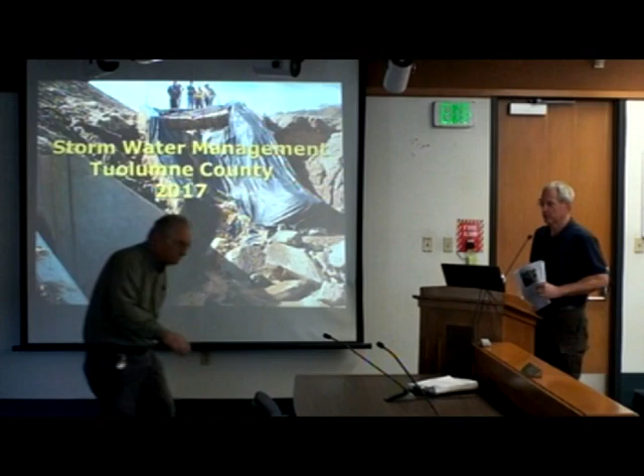And we work with both CAL Fire and some other agencies. So my name is Rich Muhl. I'm a senior environmental scientist, as Duke kind of talked about. I've been doing stormwater now for 20 plus years. I'm a stormwater specialist primarily, so I spend most of my time out in the field addressing issues and trying to deal with some of the problems.

So I'm going to talk about a number of different things today: some of the issues we saw during the 2016-2017 wet season, some enforcement examples, possible reasons for some of these BMP issues, and types of enforcement. I'll quickly go through that for anybody doing construction. I'll talk a little bit about erosion control BMPs, which are also applicable to forest practices, and sediment control BMPs, the same type of thing. Then good housekeeping and waste management, some of the other problems we had.

So I'm going to start off with the Dollar General store.

This Dollar General store - I'm going to go through a series of projects that had enforcement. Everything I'm going to talk about now had some sort of enforcement. A lot of these had administrative civil liabilities, which I'll talk about a bit later, but it's $10,000 a day, $10 a gallon is the way we calculate them.

So this is a Dollar General store. I was working in Jackson, and I was kind of barking at a guy because his site looked pretty bad. And he basically said, well, if mine's bad, why don't you go up the hill? I said, where? He goes, I'm not going to tell you, just go up the hill. It's up Highway 88. So I had to keep going until I ran into this. But when I saw it, it was pretty obvious what was going on.

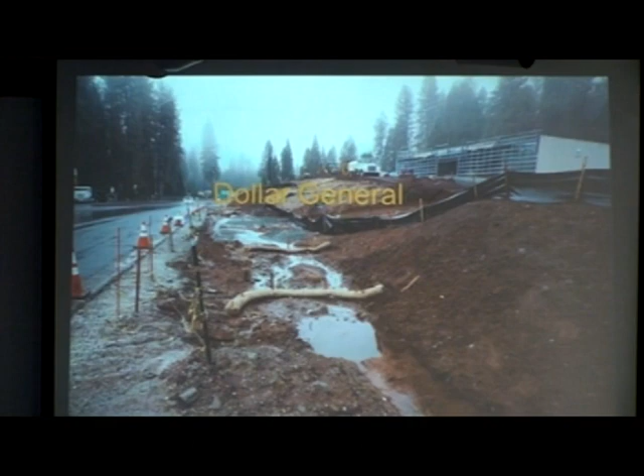So this is what it looked like when I got there. They really had no BMPs. They had some silt fence and some fiber rolls, and that's essentially all they had. You can see they got silt fence, but the silt fence is on the slope. You never want to try and put silt fence on a slope - it's going to fail if you try and do that.

And this is a risk level 2. In the construction general permit, there's risk levels - risk level 1, risk level 2, risk level 3. Risk level 2s and 3s have to have both erosion control and sediment control. Risk level 2, no BMPs, bare dirt, they're still working the ground. Now this is during a rain event when I was up there - it's raining right now.

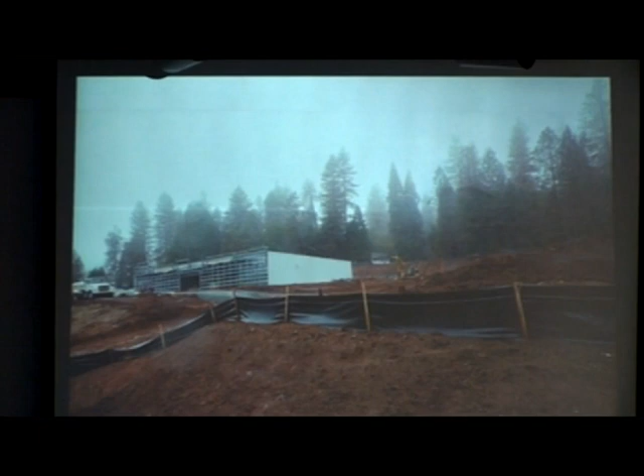And here's another picture of what it looked like. I went and talked to the superintendent. Basically I said, when are you going to install BMPs? He said, whenever I'm done. I said, yeah, that's not the way the permit works. So I explained it again to him in some detail and tried to get him to comply. We use progressive enforcement, so we always talk to the person, try and get him to do the right thing. If that doesn't work, then we find other ways to get him to comply.

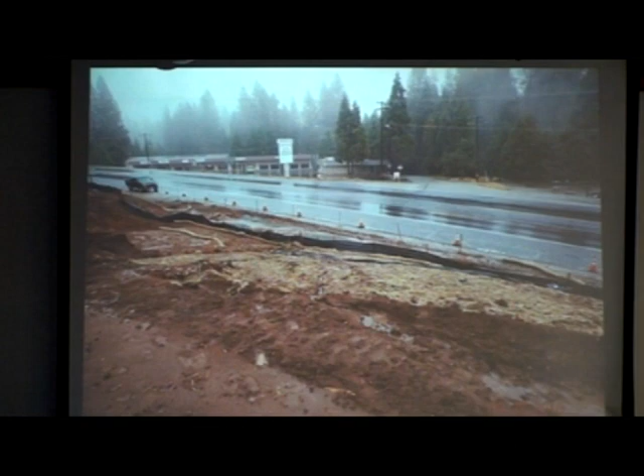So this is kind of what it looked like when I was there. It really started raining hard - it was kind of horizontal rain type stuff. It's pretty high elevation. You can see they had a light application of straw mulch, but not much, and so there was a lot of erosion going on. You can see my truck in the background down there. So it's a big site, it's 5+ acres.

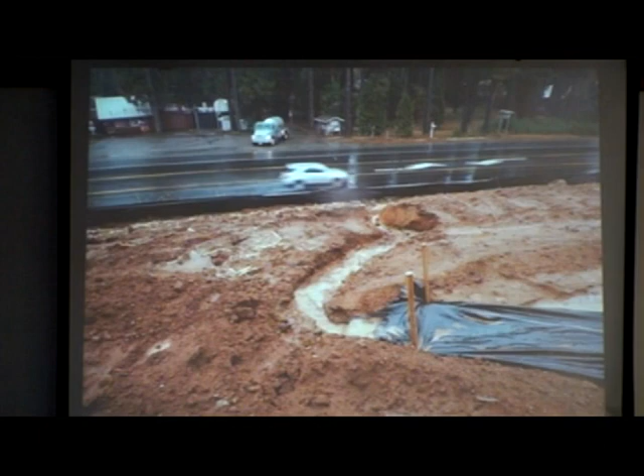One of the things they did with the silt fence is they didn't put a J hook or anything at the end to try and capture the flow. So what it did is the silt fence just directed the water right off the site, and this now became a gully. So now they're dumping onto the Caltrans right of way. It was so bad that Caltrans maintenance was there 4 or 5 times a day for 2 weeks. So they were barking at me about, hey, can't you make them put some BMPs in? So it was a problem.

The other thing that happened - I talked about putting silt fence on a slope. What happened here is a good example of it. You can see it just undercut the silt fence. A silt fence is not going to work in a concentrated flow, and so all the sediment just blew out. They got a fiber roll in there, which is kind of a token thing - it didn't really do much.

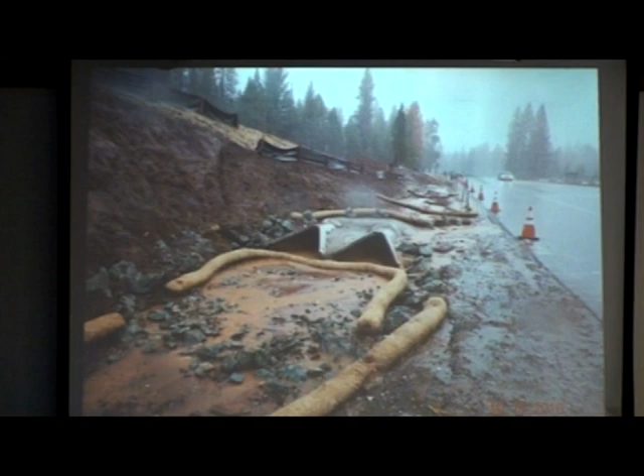So I did my first inspection, talked to the superintendent, and basically said, hey, you need to deal with this issue. This is just what it looks like on a discharge. Here's the way it looked on the street, and it goes into a culvert, goes under the road, and goes directly to a creek channel.

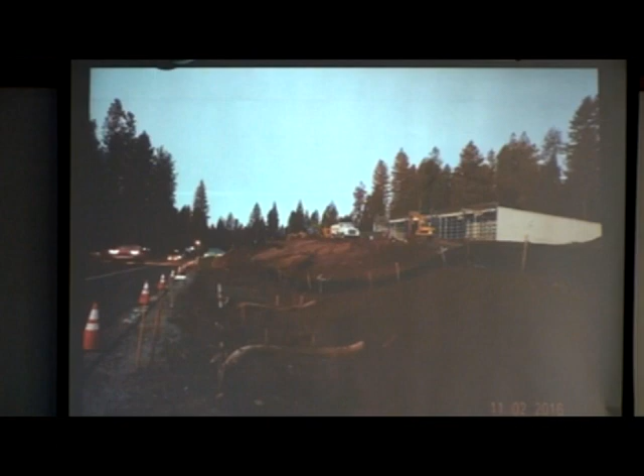So I came back about a week later. Site looked exactly the same - didn't make any changes. I mean, I think they probably tried to put some rocks on some of the fiber rolls to weight them down, but that was about it. Looked virtually the same - you can still see the silt fence. It's kind of hard up here. I don't know if we can get the front lights off or not.

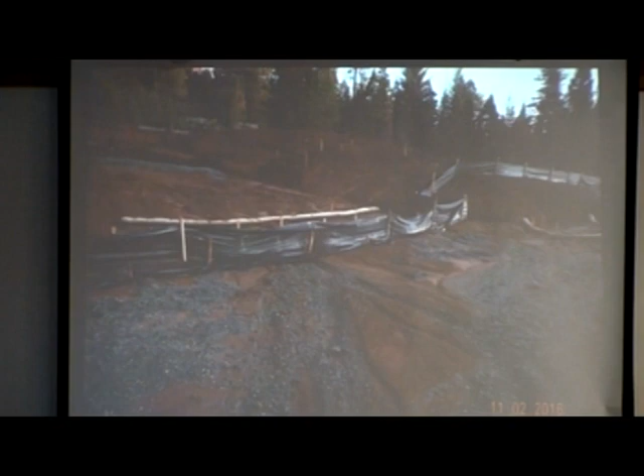No, that didn't work. Is that better? Okay, so you can see the silt fence. This was an early morning inspection, so the pictures aren't the greatest, but you can see there's still sediment going under the silt fence. It looks exactly like the last picture, and you can still see the sediment down here.

About two weeks later, I did a follow-up inspection, and now they'd installed BMPs. They've got basically blanket everywhere on the site. They put way more blanket than they probably needed, but you can see the whole thing is blanketed.

So what happened is after my first inspection I wrote them a notice of violation. I sent them the notice of violation, and they were basically warned that they needed to comply.

After that notice of violation, they had a follow-up inspection and still hadn't complied. So what we did is we wrote them an administrative civil liability. This one was for $55,000, so not a huge amount.

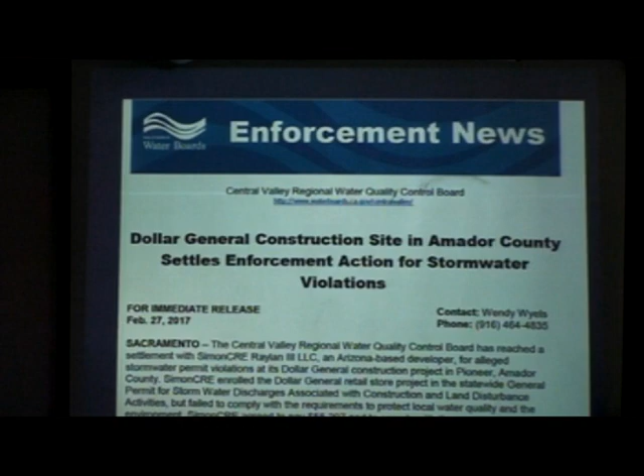We're using more of these now. There's two kinds of administrative civil liabilities we have: the full version and a compressed version. The compressed version takes the major violations and adds those in. The way our permit works, it's $10,000 per day per violation. That's kind of how the whole thing is set up.

So that's kind of what happened, and then we sent out a press release. This is a bridge project, and I was doing this particular project.

I was coming back from up in the foothills. I was wet, pretty tired, and just wanted to get back to the office and dry off, frankly. I did this project because I thought it would look really good - turns out not so much. I was there for like 5 hours.

This is what it kind of looked like when it flooded. So when I first got there, it kind of looked like this - they had a low flow pipe.

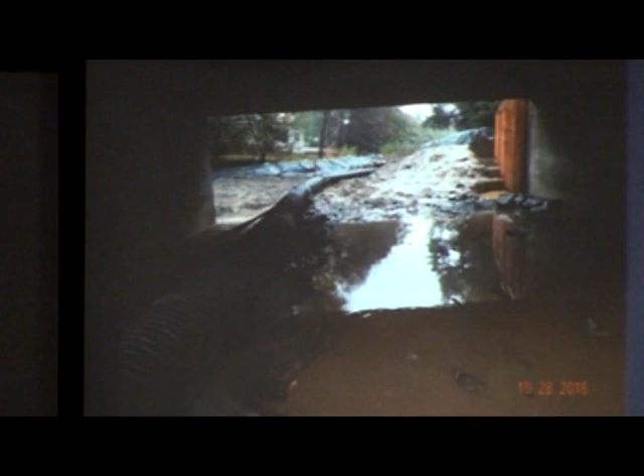Does anybody work on bridge projects? Familiar with that? You kind of know what I'm talking about - you have to have a 401, you have to have a 404. This is in a creek, so obviously it's waters of the U.S., so you have to have all those permits. Typically you dry out your work area, and then you work in your area with a method to keep it dry. In this case, all they had was the low flow pipe - this black pipe. That's all they had. They didn't have any mechanism for pumping high flows over the work area.

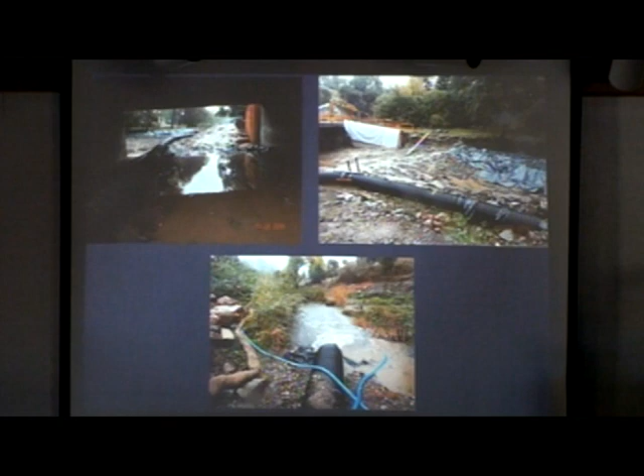So when I got there, I saw immediate problems. You can see the blue hoses - they were pumping turbid water out from inside the work area directly downstream to the creek. So that's a violation right away.

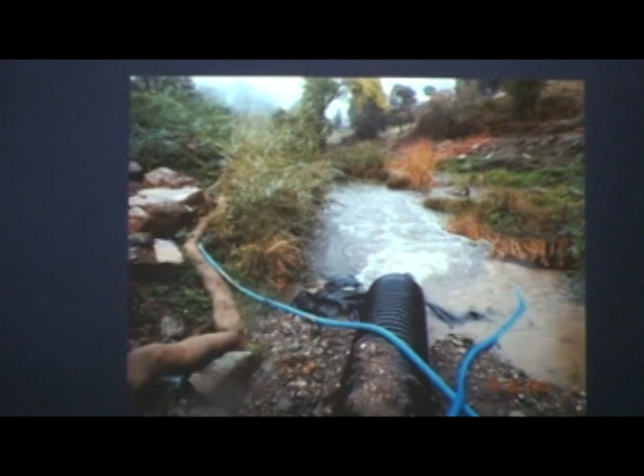But there were more issues going on. I was up at a higher elevation, it was pouring down rain, and I knew the creek level was going to come up. It always happens - it's going downhill, down the mountain. So I knew that was going to happen.

I said, what are you going to do? Do you have another pump? He said, we don't. We don't have a plan. So that's kind of what I got.

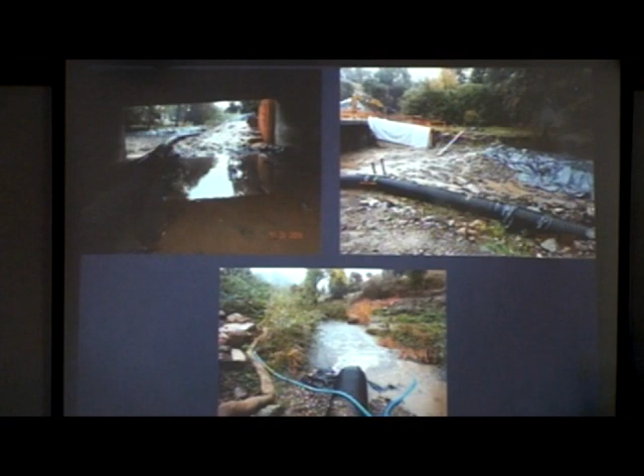So I suggested strongly that they go rent a pump or try and do something. But eventually, before that, they also had the excavator working down in the creek, trying to pull off the false work so it doesn't float down the creek when it floods, because now they're anticipating it's going to flood.

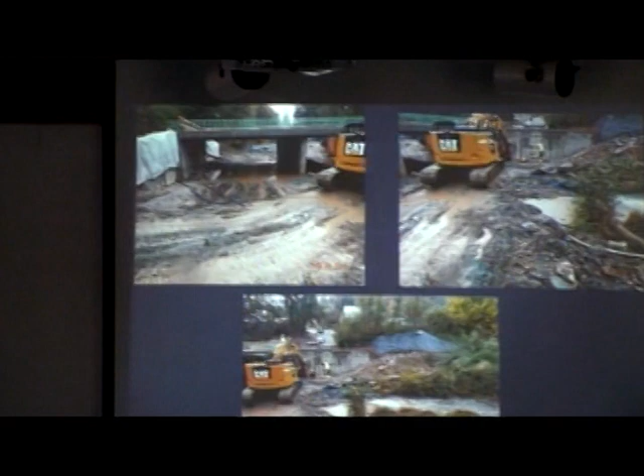So it's raining, and they're running back and forth through the creek channel in the rain. You can see in the upper right-hand picture they don't have a downstream dam, so the grousers are creating turbid water right there, and they just created this kind of mud hole.

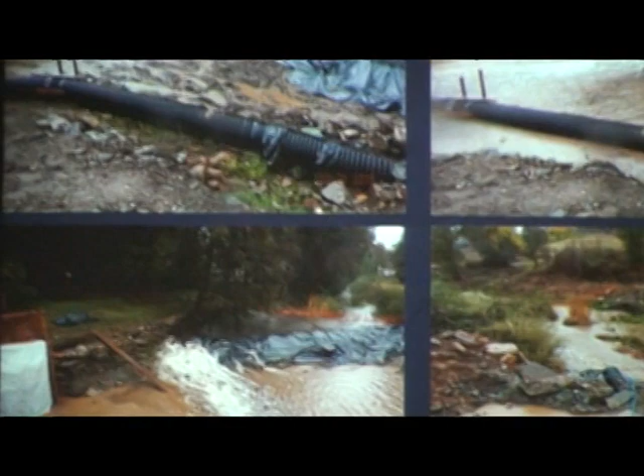Well, what happened as advertised - the water level started coming up, and I'll show a video at the very end of what it actually looked like. You can see on the upper left it started breaching the dam, then breached the dam, and then finally flooded through the entire site.

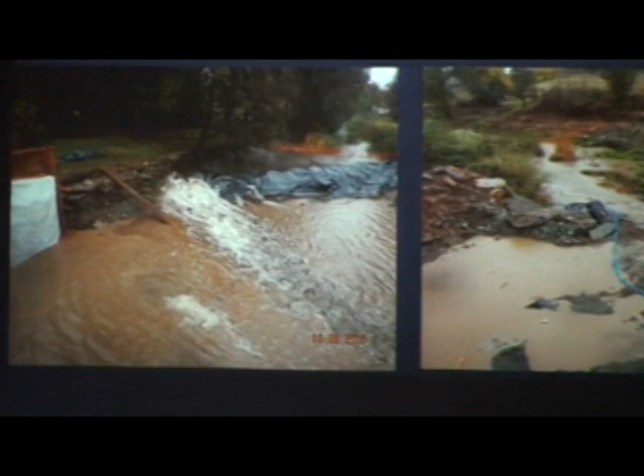And the dam was just rock with plastic on it, so it was seeping like crazy anyway - not a very good construction for trying to dewater a work area. I don't know why they didn't use sheet piling or something else, but at any rate, this one also received an ACL, and it was just kind of a no-brainer. I couldn't do much about it.

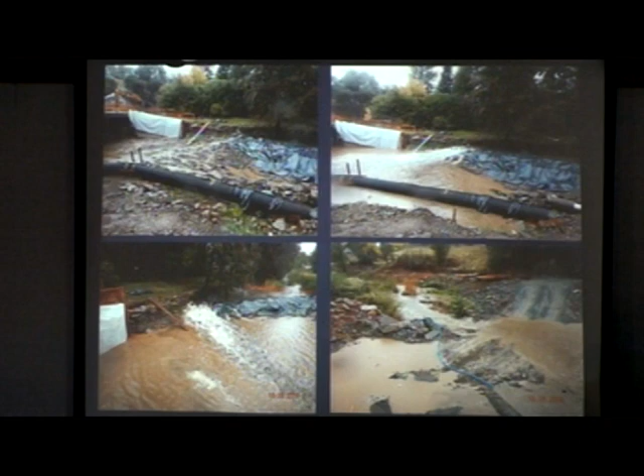What made matters worse is one of the guys working there said this was actually the second time this had happened, so that didn't help the situation either. That was unfortunate, but everybody learned. This particular bridge contractor, I've had him on a couple other projects this year, and they're much better. I think it was a learning curve.

This is kind of what it looked like. Eventually I had to crawl back over the false work because I realized I parked on the wrong side of the creek, so I had to crawl back over everything to get to my truck. It was an interesting day, but a lot of water goes through that creek during high flows.

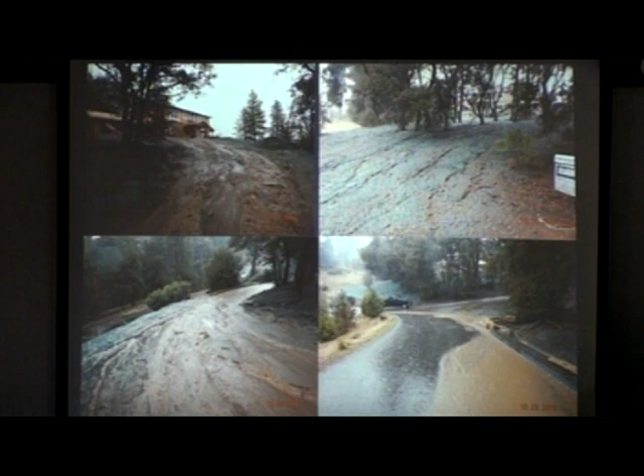Another project where you can see they sprayed it with erosion control. As I said, for risk level 2 and 3 projects, you have to have both erosion control and sediment control. If you have a risk level 1 project and you're around Sonora, you still need erosion control - you've got to have it around here or it won't hold up in the winter. It isn't required by the permit, but in order to really control the sediment on your site, you're going to need that too.

In this case, what they did is spray it with a light application of some sort of erosion control - I don't know what it was, but it wasn't bonded fiber matrix. Whatever it was, it just completely rilled out. It didn't hold up. This is a fairly high elevation, but regardless, it should have held up better than this.

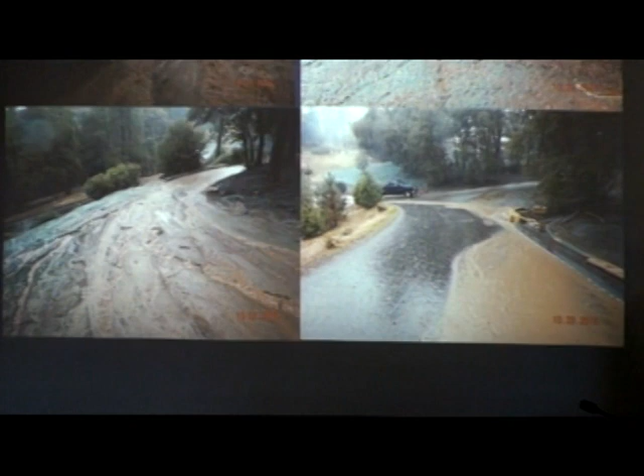The other thing they forgot about, as you can see in the lower picture, is where all the water was going to go. It was going to go down the paved driveway - it's paved, so it can shoot straight down. All that water, which later when it was done makes a lot of sense, but not so much during construction, just ran down the road to a creek, passed my truck there, and created all kinds of problems. In the lower left, you can see how much sediment actually ended up on the roadway - a crazy amount of sediment. That in itself is a problem.

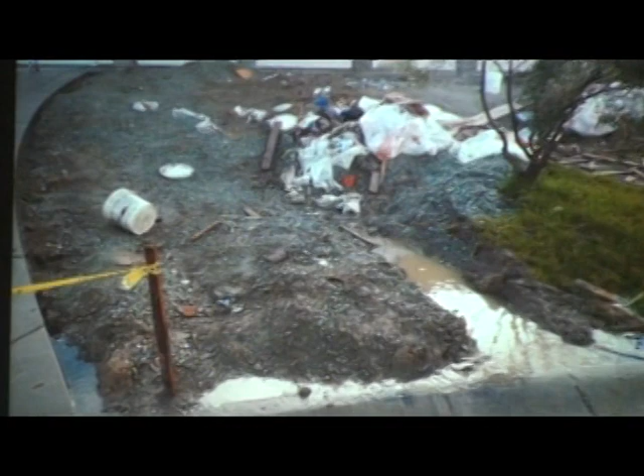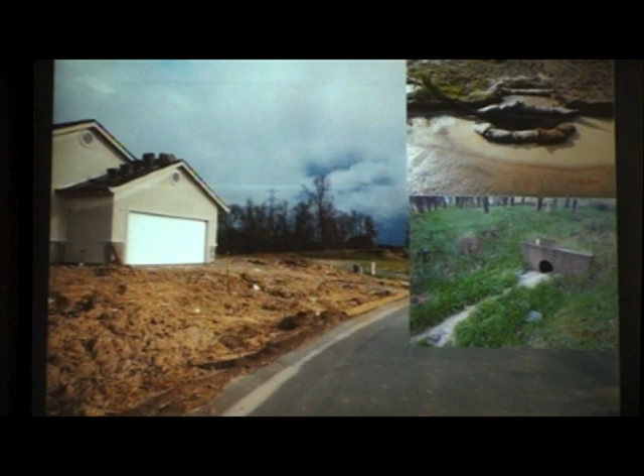Another site that got an administrative civil liability from us, a fine. This particular one had really poor housekeeping, and they just didn't install any erosion control BMPs. Again, it's a risk level 2 site. They had all kinds of persistent issues - we talked to them multiple times, the county went out and talked to them multiple times, a different county, not Tuolumne, and the county wrote stop work orders against them. They still decided not to do it, so we wrote them an administrative civil liability. This particular individual has been fined by us before for a couple hundred thousand dollars, so their track record isn't going too well right now.

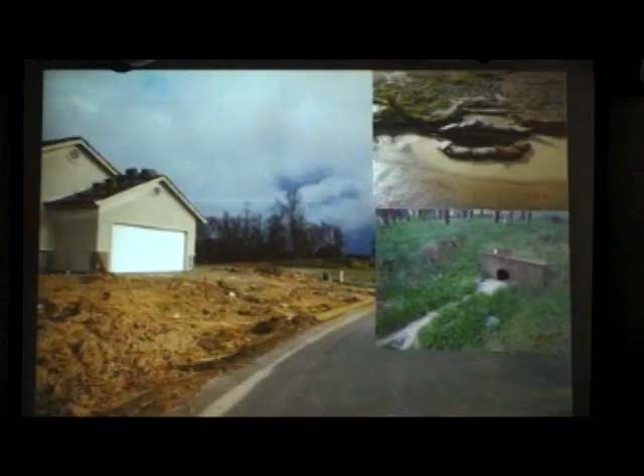You can see all the sediment in the upper right-hand picture, around that drain inlet - that had been going on for a while, it didn't just happen overnight. And the bigger picture shows there's really no erosion control at all. They did broadcast some straw, but it isn't going to do much.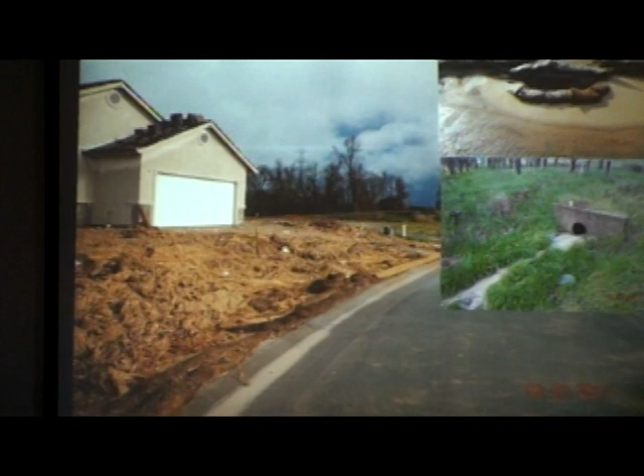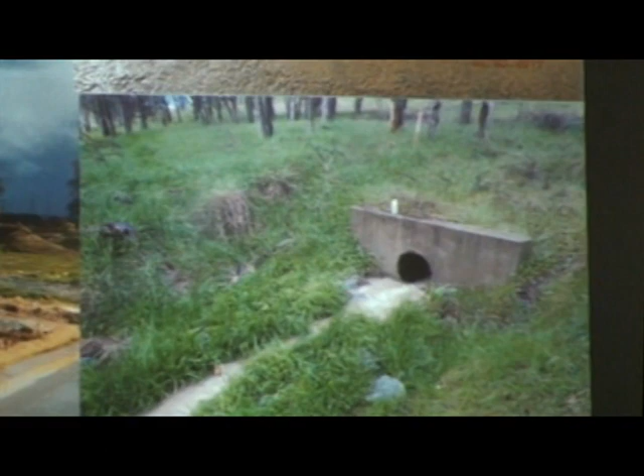You can see my sampling bottle here, down by the creek where it went in. Typically we always sample. In this particular inspection, the QSP - there's a QSD and a QSP on construction projects - was actually doing their own sampling, and we got the same numbers for our turbidity readings. We all agreed on everything we saw, so that was kind of interesting to do a joint inspection. We did them separately, then came back and shared our results.

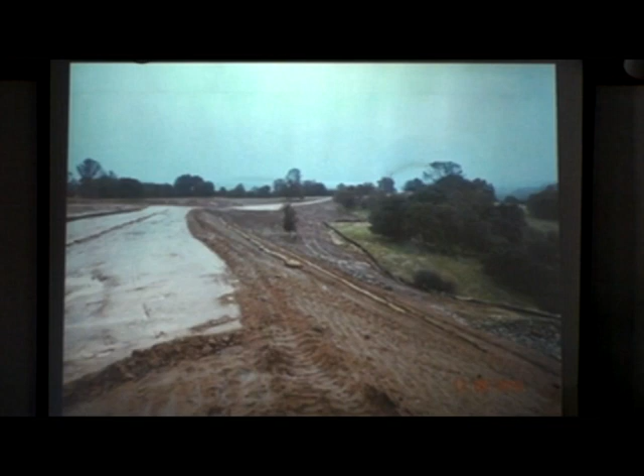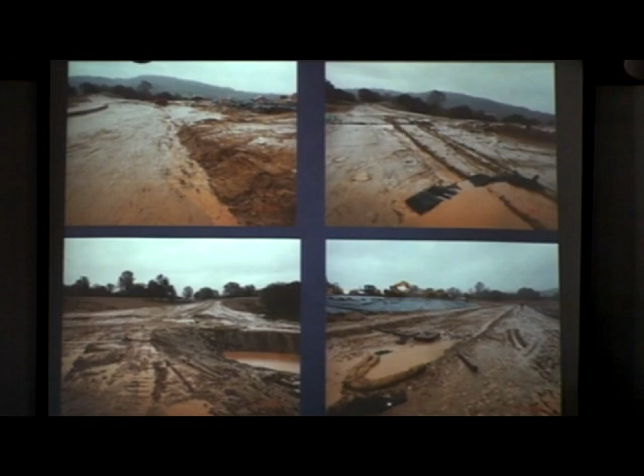Here's another project with a lot of slopes - a long linear project, a lot of slopes, open ground, right before a predicted rain event. I went out and did the inspection on this one, thought it would look good, took a look at it - there were a lot of problems. I went back and talked to the superintendent, who hadn't walked out there yet to take a look at what was going on. You can see a lot of slopes, a lot of issues. One thing that happened here: there were some sediment control BMPs put in place, but no erosion control BMPs.

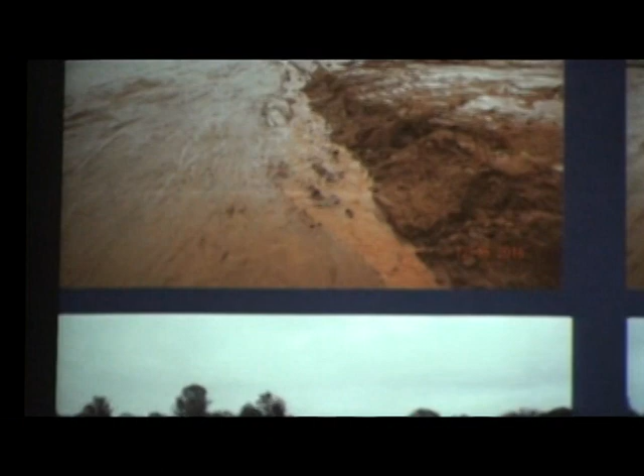What was happening is it was just flowing over the top of the sediment control BMPs. So we got long runs, and the water really gets moving. The other thing that happened, you can see it rilling down on the upper left there, cutting through. There's some rock bags, some BMPs in place.

There was a small basin, but not enough to really stem the flow of water coming down the hill. One of the other things that happened on this project, and I'm talking about it because it's good training, is the road was compacted. When you compact a road, do you get more runoff or less? You're going to get more. And what happened is the storm drain system went active just a couple days before that too. So the storm drain system, now active, picked up all this water and shot it down the hill in a more concentrated flow, which made it much worse than before because it just sheet flowed off the site.

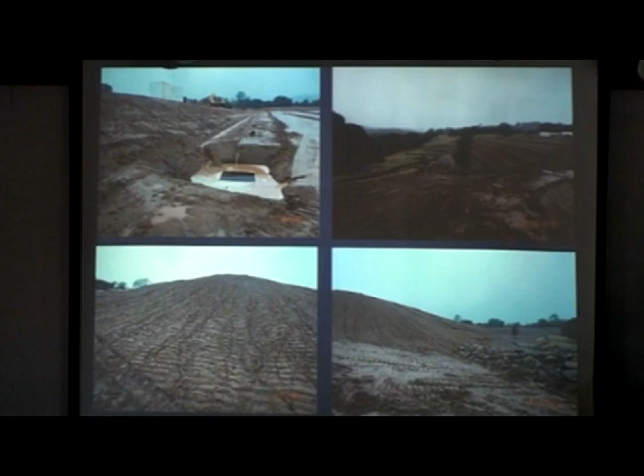So that's one of the problems. And then you can see big slopes with really no BMPs. On the bottom you can start to see the rilling. Once it gets rilled out, it creates a lot of problems. This particular one got buttoned up eventually, but in Sonora particularly we've had a lot of problems. If you get behind, it's really hard to catch up if it keeps raining. Once the ground gets saturated, you really can't rework it, and that's the problem.

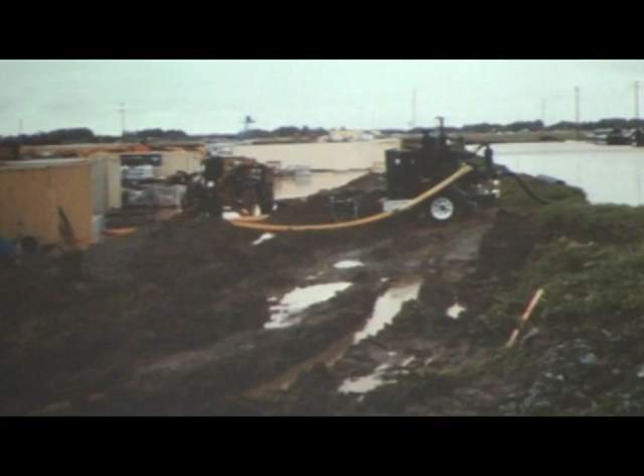This particular site is Amazon, in Sacramento. They got an enforcement action from us. This is a big site and they really never dealt with the run-on they had. They had a lot of run-on coming onto their project, which they really should have tried to divert around it, and that would have helped their situation, because they were dealing both with the water that fell on this large site as well as the run-on coming onto their site. So if you have a facility or a project with run-on, try and get the run-on around your site. Don't try and deal with it on your site. This is a good example of that.

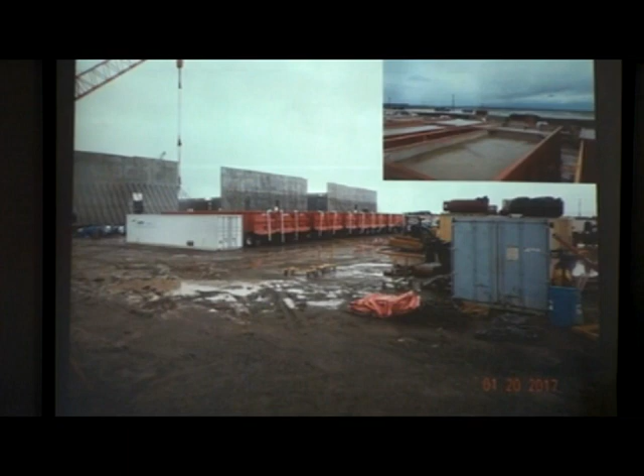The other thing we saw is a lot of advanced treatment systems going in - they were going in everywhere. Advanced treatment is when you can't do anything else, you've got to treat all the water, reduce that turbidity level, and sometimes reduce the pH. We saw a lot of those types of things going in. This is a big system, also at Amazon eventually, because they couldn't do anything else - they just had to treat all the stormwater.

The other thing we saw - I don't think you use lime treatment a lot around here? Do you treat with lime? Okay, it's pretty rocky anyway. Down in the clay soils they do.

So I want to talk a little bit about the type of enforcement we have at the regional board. We have verbal warnings. So anytime I'm doing an inspection and I see something that's probably not going to work, or I think it might not work, I'll say something like, you might want to take a look at that portion of your project, I'm not sure that's going to work very well.

You might just look at the BMPs, or if they aren't maintained, I'll say, hey, you probably need to maintain those BMPs, they're not going to hold up. That's considered a verbal warning, so that goes into our stormwater management database as a verbal warning.

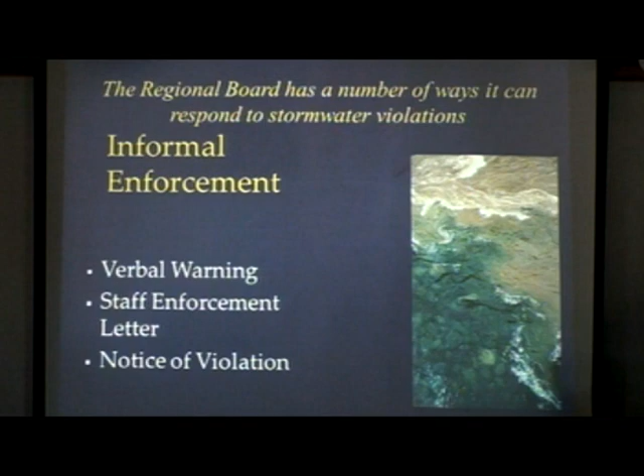The other one, more informal, we don't do staff enforcement letters, but we will do notices of violation. A notice of violation will compel the property owner. All of our enforcement goes to the property owner, which sometimes gets confusing because they paid the contractor to do the work and all of a sudden they get this notice of violation and aren't sure what it's for. So you want to communicate with them if something happens too. The notice of violation asks them to do a bunch of different things - it could be to add additional BMPs, to provide a class to their subcontractors. It just depends on the situation, kind of what we require.

Our penalties are $10,000 a day plus $10 a gallon, $10,000 a day per violation. For the Dollar General store I showed, they had $50,000 the first day I was out there - there were 5 separate major violations, so that was $50,000. Obviously they add up really fast, so you want to try and stay off our radar.

If a regional board inspector or municipal or county inspector comes along and says, hey, you need to fix this, because they'll talk to us and we're often aware of some of those problems, that to us is a verbal warning already, so we're quicker to go to enforcement.

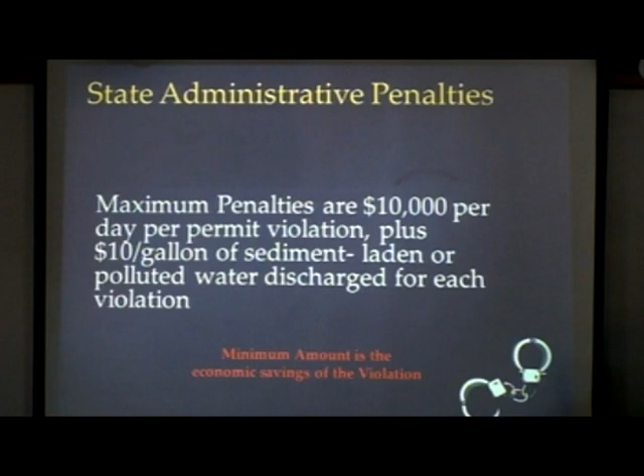The other thing we have to do is calculate the minimum amount of economic savings. There's a savings in not installing these BMPs - you don't have to put BMPs in, it saves you money. We have to calculate the minimum amount of economic savings in our enforcement so the discharger has to pay for that plus whatever the penalty is. Sometimes that adds up pretty substantially on some projects.

Formal enforcement - a cleanup and abatement order is where we ask somebody to clean it up and get rid of it. For instance, in Tuolumne County several years ago, someone built an illegal dam - he had a friend who traded him a case of beer for building a dam in a creek. About 5 days later, the water level came up and washed the dam away. It wasn't engineered, it wasn't constructed properly, I don't think it was compacted either, so it all washed down into the creek. We wrote them a cleanup and abatement order - he had to go in and clean it up, which they did, and had to restore it, get permits through U.S. Fish and Wildlife and the whole permitting maze of stuff. At any rate, that got cleaned up - that's a cleanup and abatement order.

A full administrative civil liability is the larger one, where we're taking all the violations from the first time we went out there to whenever it got solved - all the violations per day for the whole time. A streamlined ACL is what I talked about earlier, where we're taking the major violations and adding that in. We can use either one of those.

Joint enforcement with the Department of Fish and Wildlife now, or the US EPA - I do a lot of joint enforcement with the wardens and Fish and Wildlife on a lot of different things. Some of my cases also get referred to the district attorney or the circuit prosecutor's office, and some go to the attorney general's. Those are the larger ones - we've had some fairly large ones recently.

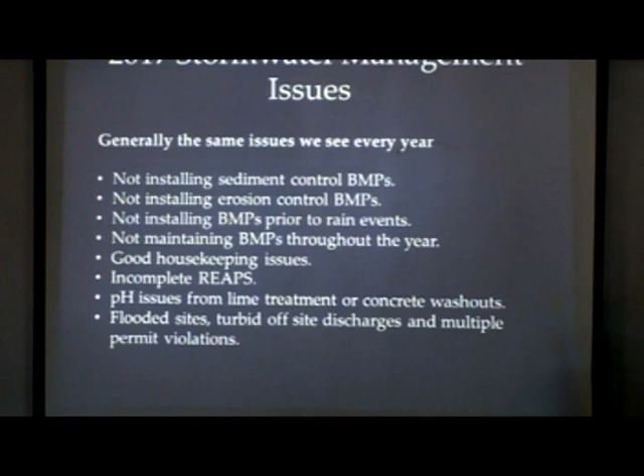So what were some of the issues? They're kind of the same issues we have every year - not installing sediment control BMPs, not installing erosion control BMPs, not installing BMPs prior to rain events, and not maintaining the BMPs. That's the other thing throughout the year - there's kind of two seasons. The first half of the year, we try and get people to put them in. Then after Christmas or New Year's, we try and get people to just maintain what they put in because they're wearing out.

Stormwater BMPs don't last forever, so you have to go in and maintain them. You got to make sure they're still functioning. And that's why there's inspections. There's a requirement to do inspections in the permit.

Good housekeeping issues continue to be a problem. Anytime there's a facility or a site project that has bad housekeeping, what we'll do is stop, get out, walk around, because we always find other problems. We also get good pictures for training, but incomplete rain event action plans.

There's a requirement in the permit that 48 hours before a rain event, you have to do what's called a REAP, rain event action plan. Basically what you do is write down that there's a predicted rain event greater than 50%, and here's what I'm going to do to stabilize my site. Then you go out and implement it. A lot of times the REAPs aren't being done.

pH issues on lime treatment, not up here, but in other areas, has been a huge issue. Concrete washouts continue to be an issue.

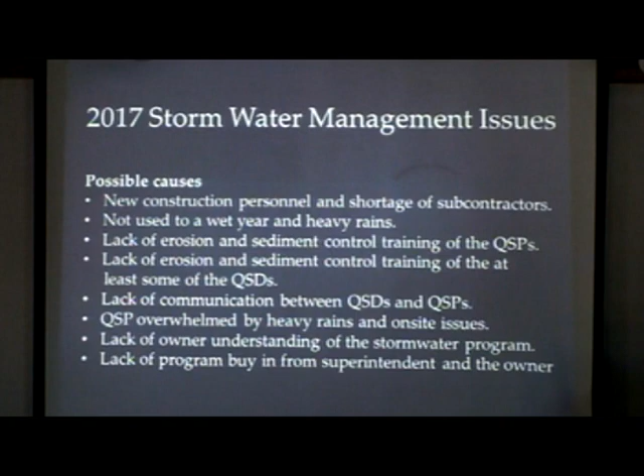There's also a lack of program buy-in from the superintendent and the owner. Some superintendents just don't care. I mean, that's all right, but that's our job then to try and flesh them out.

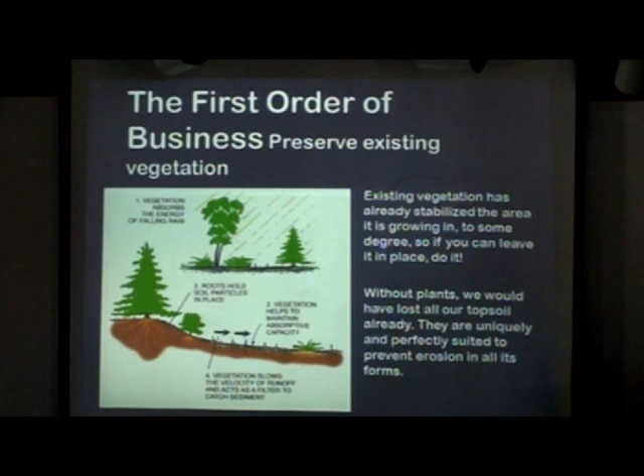So I want to talk a little bit about what to do, what we want to see when we go to a construction site, and some ways you can stay out of trouble. One is if you can preserve existing vegetation around the outside of the project, it's a huge BMP, even if it's just a 10-foot strip of grass. Doesn't have to be a lot, anything. Especially if it's tall weeds, it'll take out a lot of that turbidity or turbid water. It'll help filter it and catch a lot of the sediment moving around the site.

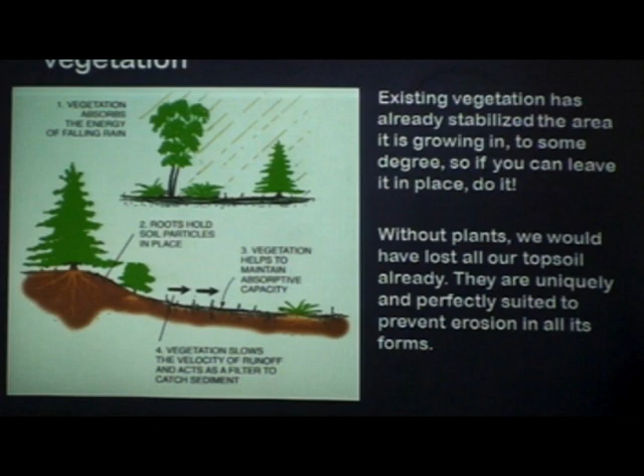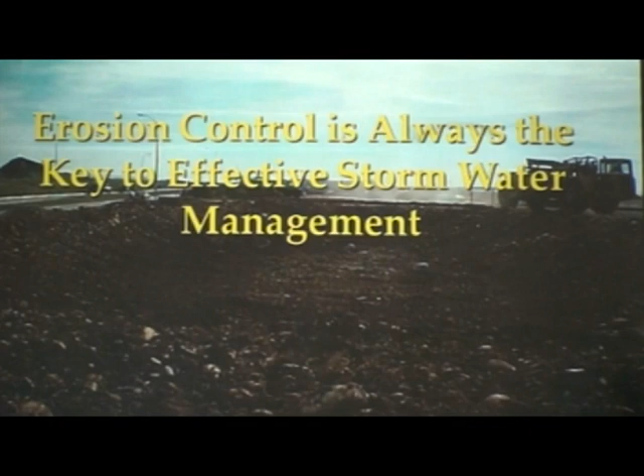Erosion control is always the key to effective stormwater management. The difference between erosion control and sediment control: erosion control protects the dirt or soil from the impact of raindrops. When it rains, the raindrop comes down around 20 miles an hour, hits the soil, and breaks it apart. That's called splash erosion, and it runs off as sheet erosion typically on a construction site. Roughly 70% of the erosion off a construction site is sheet erosion. So if you can protect the soil from the impact of the raindrop, it's not going to break apart those particles. I have a slide, not in this presentation, that shows a raindrop coming down and blasting the soil particle apart. Especially in a heavy rain up here in Sonora, that's what happens all the time, and that's why it loosens everything up - you could see from the pictures it was just flowing straight off site.

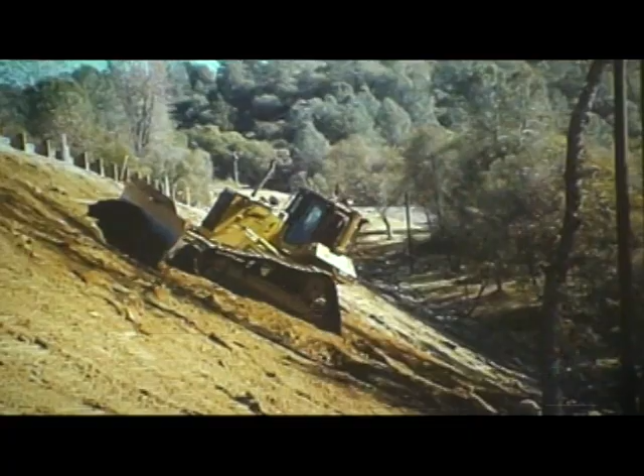So erosion control is always going to be the key. Track walking - you could see some of those projects I showed had very minimal track walking. What it's doing is the grouser's going up and down the hill creating little ridges, so the water has to flow over them. But that's not going to work if you get a lot of water. It'll work for a real lightweight rain event, but you've got to put something on top of it.

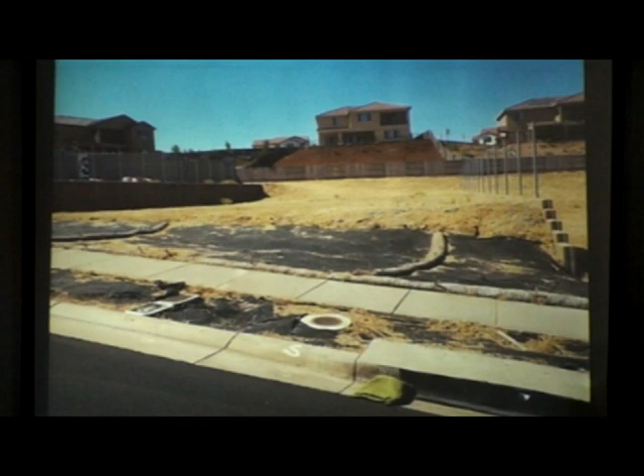Here's straw on a little larger subdivision - not a big subdivision, but still this straw is in a pretty good place. You want it down thick. If you're going to hand broadcast it, about 2,000 to 4,000 pounds, so it should be thick. It takes a lot of bales.

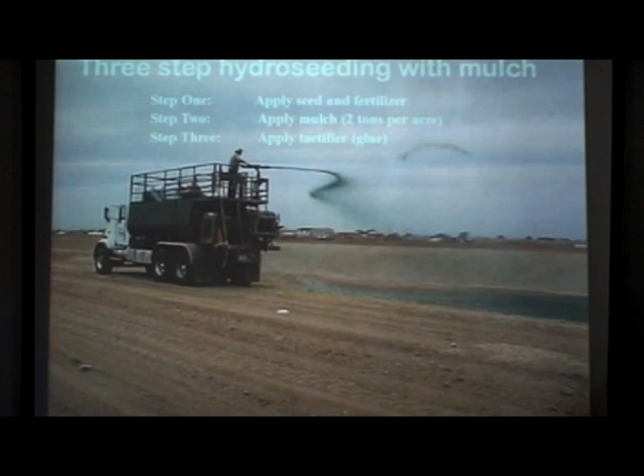Three-step hydroseeding with mulch also works, that would be the next step up. You want to make sure you apply it in three steps, not all in a slurry. There are different ways to do it now - the technology for some of these spray-on applications has gotten really good, much better than it used to be. It used to be okay, but now it's getting much better. Some of these will heal themselves quicker - if there's a break in them, they'll kind of seal back together. They do a lot of stuff. You want to try and apply the seed and fertilizer first, then the mulch over the top at 2 tons per acre, and then the tackifier or glue.

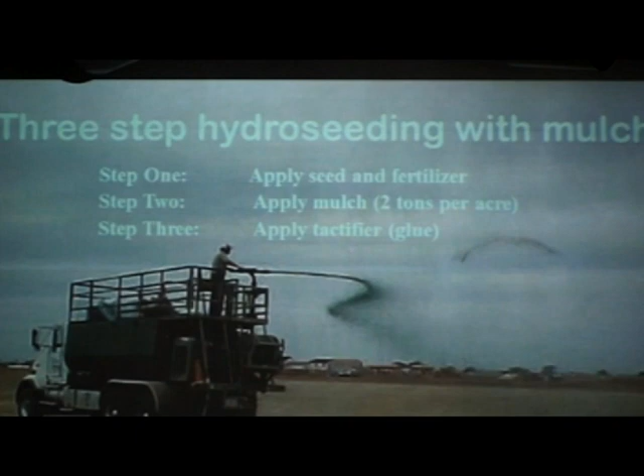A tackifier is guar or plantago, essentially like Elmer's glue kind of, not really, but it sticks the straw in place. Before a rain event, it typically gets windy. So if you hand broadcast a bunch of straw, the wind will come up, and I've seen multiple sites where it'll blow the straw on one side, leaving a bare slope with all the straw at one end. If you can get it tacked down so it sticks together, that's going to really help.

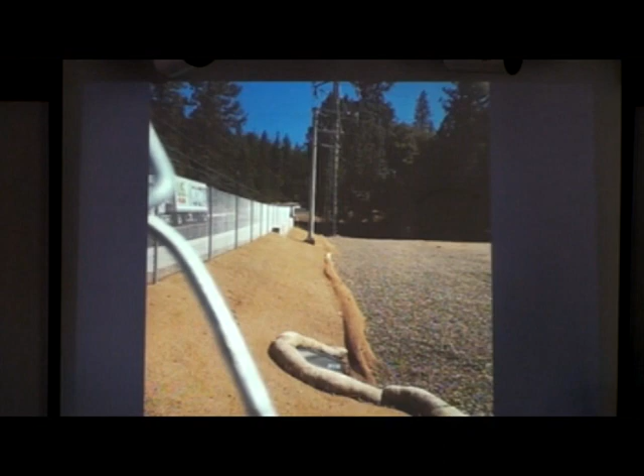Here's a better application for blanket, a little small, along a roadway—I think this is Highway 80. You can see this is a laydown yard they have, but this is a better application for what it is. Some people use geotextile fabric too, I see it used around here, and it works well.

You just put geotextile down, and you can sometimes reuse it too. That's another good thing to do, especially if you have clay-y soils with a lot of clay material—it won't pump through it, so that can sometimes help. And then you can see the fiber rolls on the outside.

Hey Rich. Yeah. That plastic, if you did a big enough application, could you actually end up getting sued for creating problems downstream for adjacent property owners? Because you've modified the basin there.

That could easily be the case, because on this particular project, I don't know how high the runoff was, but once they put the plastic in it created all kinds of downstream problems. So it's possible, yeah.

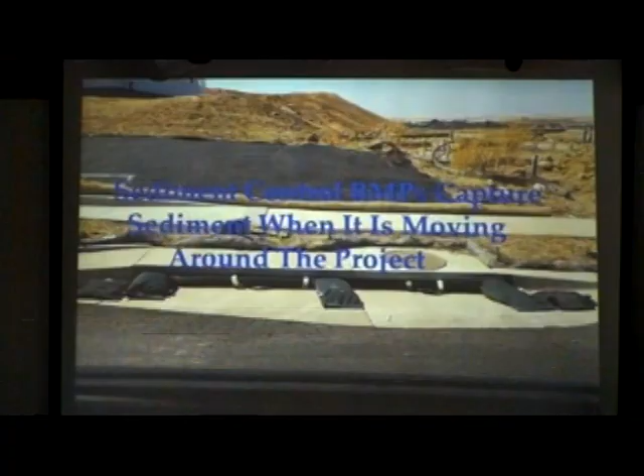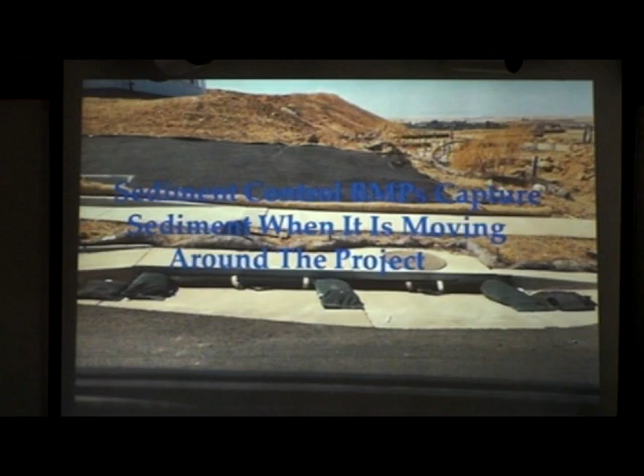Sediment control BMPs are going to capture the sediment. Erosion control is going to protect it from the impact of the raindrop. Sediment control BMPs capture it once it's moving around, so that kind of makes sense—you don't want to try and capture it, just keep it locked in place. They're going to capture it when it's moving around.

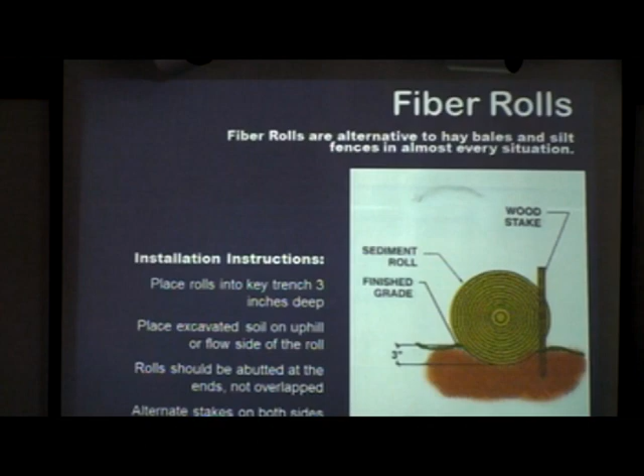Fiber rolls—basically fiber rolls, you see a lot of them. There are different kinds. If you use the wildlife-friendly fiber rolls, you can leave them in place at the end of the project. If you use the netted fiber rolls, you have to remove them at the end of the project.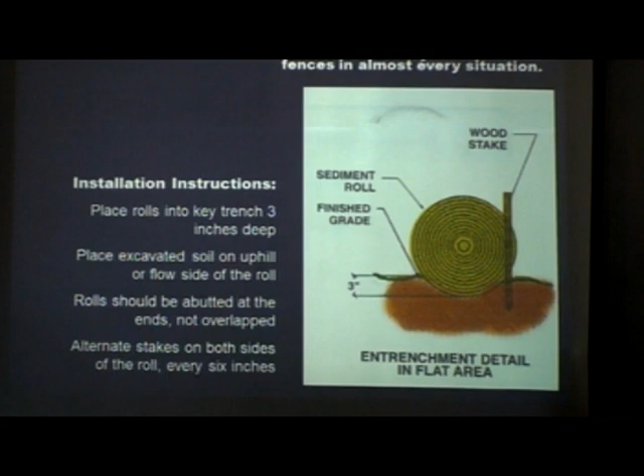This staking pattern—this is an old photo, I'm not sure this staking pattern is exactly right, but you've got to stake these things down. If you just lay them on the ground, they're not going to do anything. They're round, so you've got to make sure the bottom is down so when the water hits it, it'll actually stop. There are some studies being done on these fiber rolls now—in certain applications you don't want to stake them down really hard, but that's all anecdotal so far.

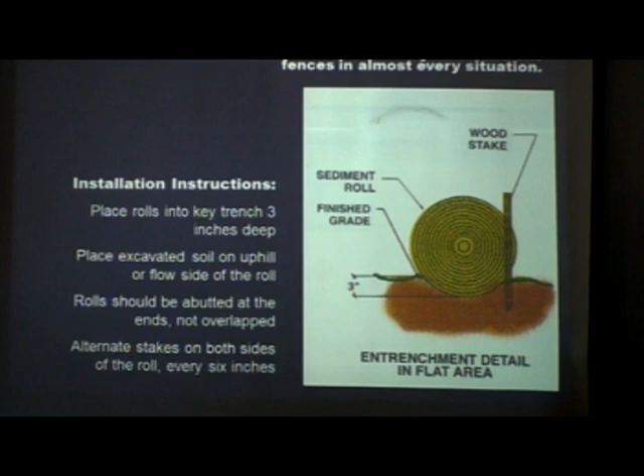But we might see some change on some of the applications for staking fiber rolls. Right now, you want to get them down. Fiber rolls come anywhere from 6 or 8 inch up to like the big 24 inch ones. The big fiber rolls can replace hay bales too.

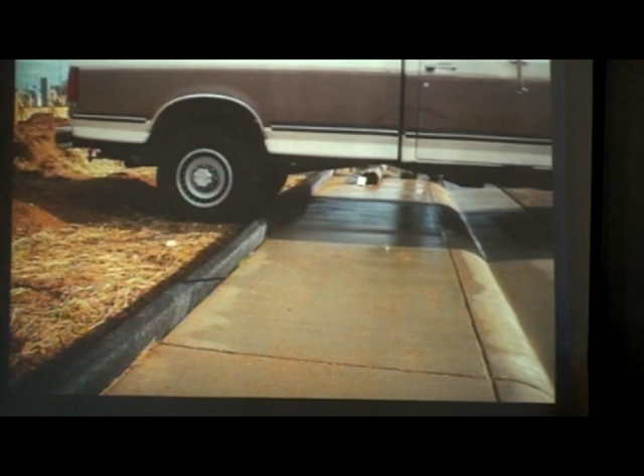This is another type of fiber roll you can actually drive over. There's a bunch of synthetic versions out there. There's Filtrexx fiber rolls, all kinds of different names. Some have compost in them, some have straw, there's a bunch of different types. I don't have pictures of all of them, but there's a lot of product out there now for fiber rolls. You just got to take a look and see what's best for your application. Do you want to reuse it? There's a lot of different things to consider.

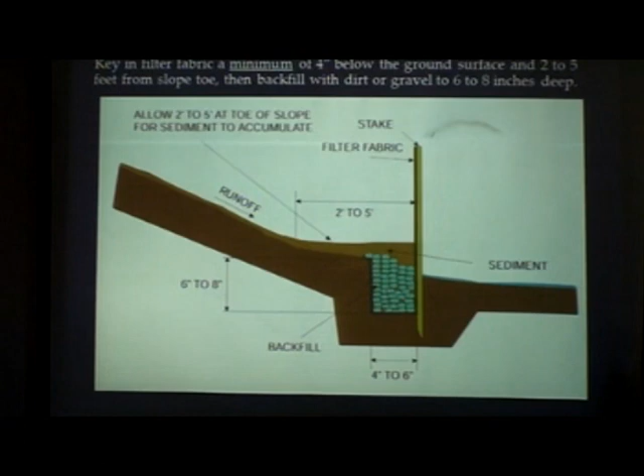Silt fence is an older BMP, but again, you can't put silt fence on a slope. You should be 2 to 5 feet back from the toe of the slope, because you want an area for that sediment to drop out. If you run a lot of water on silt fence, especially on a slope, it's just going to fall over. It's not going to work. Even the wire-back silt fence, with heavy welded wire on it, will eventually get undercut and fail because it's not a dam. It's not going to hold long term.

You also have to trench and stake them in. There's a line on silt fence, usually orange or yellow, and you have to stake it in at the bottom to that line. If it's not done right, it's not going to work.

Hey Rich, on that silt fence, how much accumulation should you allow before you go back in and maintain that silt buildup? What's your spec, do you have a spec for it? No, I have the same diagram you have, but I don't think it states what the threshold is.

It doesn't specify. I would do it when it was about half full if it was me, because if it puts pressure on the silt fence, it's going to fall over. Silt fence doesn't last forever either, it'll break down. The UV rays break it down, so when you first install it, it might work pretty well, but towards the end of the winter it's not going to be working too well because it's been out in the weather and it's cold. Another problem is if you're trying to clean the silt out from behind it, it doesn't take much from the shovel to tear it, and now your silt fence is compromised.

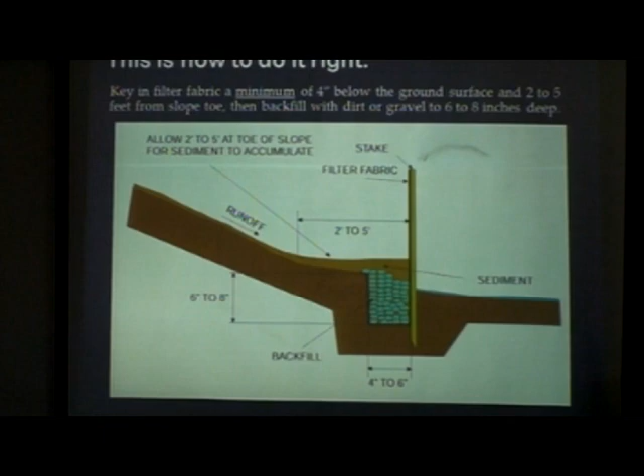Silt fence isn't my favorite BMP, and the reason is I read a study 4 or 5 years ago that for every $1 you spend buying silt fence, you spend $1 in maintenance. So it's a high maintenance thing because you've got to come in and clean out the sediment. Half the time, if you're using wood posts, you have to restake it because the posts snap off, and unless you're using T-posts, now you've got that issue too. There may be some applications where it works great, other applications where I'm not sure it works so good. It's an older BMP. For a barrier, it works well to keep people from driving through. There's certain things it works for, but some things it doesn't.

The other thing I talked about is you don't want to concentrate the flow on a silt fence, like at the top. You want it to spread out the flow, because you don't want to put pressure in any one location.

Tracking on roadways - I just went by a couple sites when I was coming here this morning. They had a lot of tracking. They're doing some haul work up in Angels Camp, and they've got some issues going on.

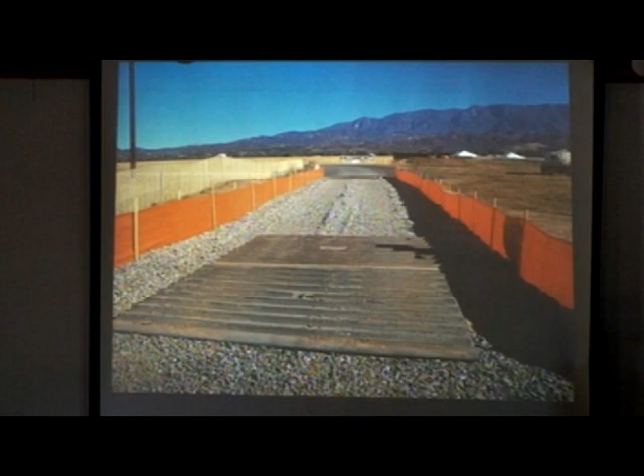These metal rumble strips will shake the tar out of your car, but they work really good for trucks, and they'll knock a lot of that sediment off. Sometimes you have to make your construction entrance as long as it needs to be to get the sediment off. I had one last year that was almost 200 feet long and still wasn't working.

Then they had to put a tire wash in because they just kept tracking onto the roadway. It had this weird clay soil and they couldn't get it off the tires. So you just have to take a look at your site and figure out how big a construction entrance needs to be. Typically they're 50 feet, but for some of the projects up here, they don't necessarily need to be that long.

So you just need enough so you're not tracking onto the roadway. Tracking on the roadway, you need to sweep up. That's one of the number one complaints we get, is tracking on the roadway. Once it starts raining, the phone just starts ringing, and 90% of the time it's somebody tracked onto the roadway.

Laydown yards, you want to have a laydown yard. If it's on your project that's fine, but if it's off-site - right now I'm working with PG&E up on the fires, a couple of different fires. One of the things with PG&E is they have all these laydown yards, so I'm working with them to make sure they have BMPs installed, and they do a good job.

But make sure they have their BMPs in place and they're taking care of everything. So a laydown yard, you want to have it gravel or something solid. You don't want to track out onto the road every time you go pick something up.

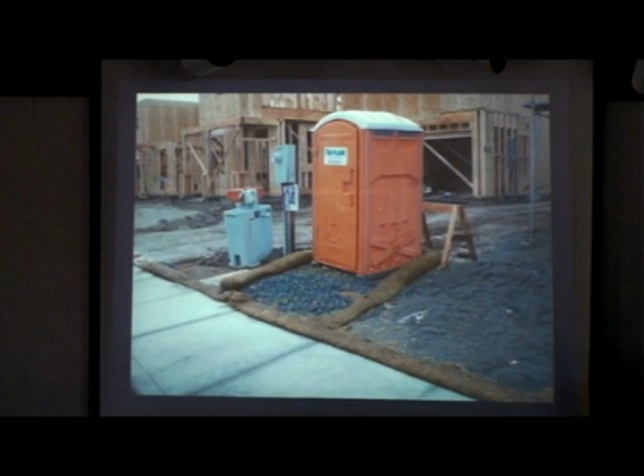Portable toilets - you really don't want these things falling over next to a creek. This one's in more of a production area, but you don't want one. If you're on a smaller project up here, don't stick it by the edge of the project by the creek, and don't stick it by the road. Put it somewhere where if it falls over, the blue water isn't going to go anywhere, because that's kind of bad.

I've done a couple different trainings where I was doing my training, and the guy washed it out and the thing fell over, and all the blue water ran right behind where I was doing the field training. It was an interesting moment, but you don't want to do that.

The permit requires all dumpsters to be covered. So before a rain event, the dumpster lids have to be closed if you have a dumpster. If you have a 40-yard dumpster, it needs to be covered. If you have a 20-yard dumpster, it needs to be covered. If you have just a little dumpster, it should have a lid. So make sure if you're on a construction project, you have a dumpster with a lid.

If you have stockpiles, they need to be covered. If you have a large concrete rubble pile, they're sometimes really hard to cover, so berm it or something else. But the larger pile, or a pile like this, you need to cover.

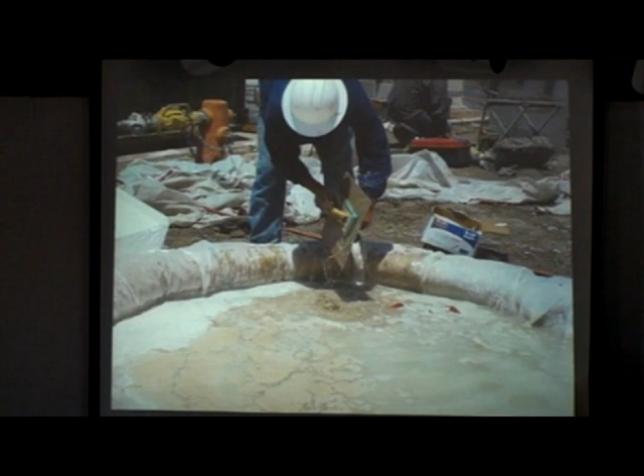Washouts - you want to have a washout. You don't want to be washing stuff on the ground. If we see white stuff on the ground, we know folks are washing something out on the ground. So what we want to do is make sure people have a washout. I think everybody's using this one, but you can tell he's washing his stuff off in the washout, not other places. And then this water needs to be disposed of properly.

So here's the 40-yard dumpster that's not covered. This was a $10,000 penalty for not covering this dumpster. The reason was there was this whitish-blue, I don't know what was in it, water washing out the bottom of this thing. And so that's a pollutant that's coming straight out - it went right into the storm drain, or down in the street when it went into the storm drain.

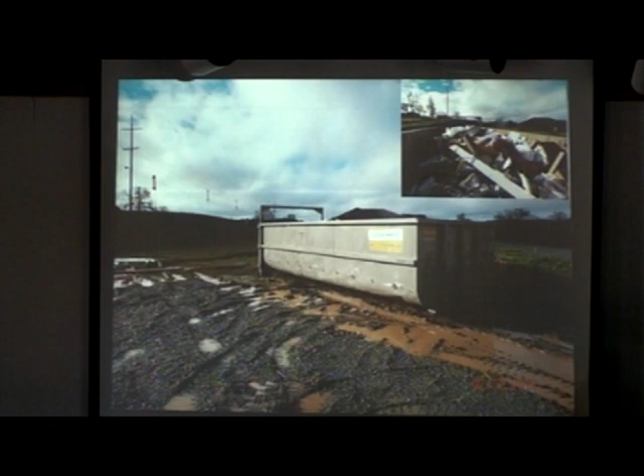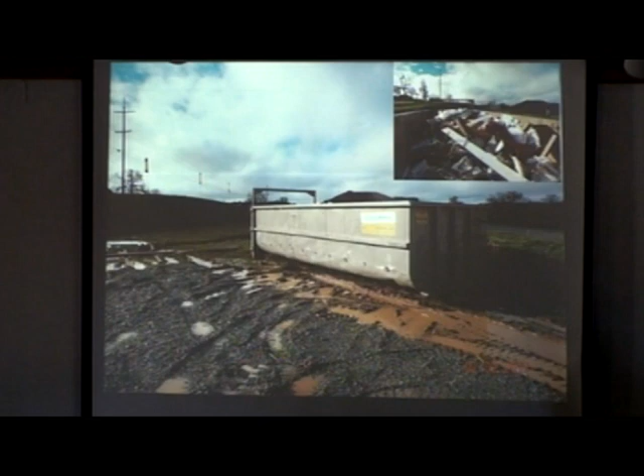There's a frame that fits on top of the dumpster. You just set it up there, and it's like a kind of metal frame. So there are options out there, but it is an issue with the tarp because the tarp bags in, all the water falls in, and then you're like, why did I cover my tarp? Or why did I cover my dumpster? Because all the water fell in.

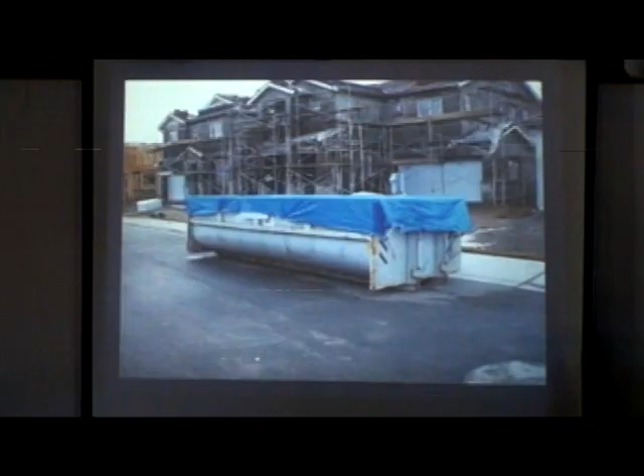Okay, so what I'm going to do now is I want to see if I can get out of this and show you the video.

Okay, I think this one is a silt fence. Let's see.

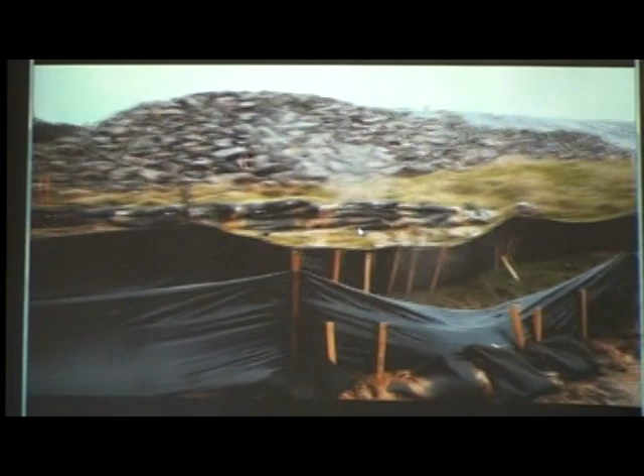Yeah, so this is what happens when you put silt fence in a concentrated flow. It's just not going to work. And in this case, they put multiple layers of silt fence, but you can see the water going through it, and you can see the rock bags. I mean, it's not like they didn't have BMPs, because they did. It's just not going to work in a concentrated flow.

And I've got one more, I think, to show. Let's see.

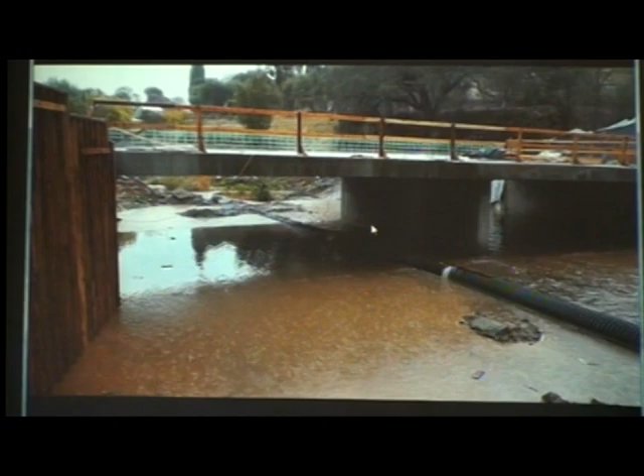This is what it looked like on that bridge project when it flooded. So you can kind of see how I was just standing there going, you got to be kidding me. This is really bad. And that little low flow pipe is not keeping up, obviously, so it flooded out their entire site.

And the other thing is, really, from a construction standpoint, they had no BMPs on the banks either. There was a bit of straw, but for the most part there wasn't anything on either bank. So they didn't have construction compliance. That particular project had a construction permit and also had a 401, 404 permit, and they didn't comply with either one of them.

What county was that? Yeah, it's in Amador County, Sutter Creek, city of Sutter Creek.

So Duke wanted me to talk a little bit about industrial. If it's an industrial facility, coverage under the industrial general permit is based off the SIC code, the Federal Standard Industrial Classification, if I got that right. That particular code was written by the EPA years ago. Certain types of industries are in there, and certain types are not.

I wish I would have brought it with me. I'm not totally prepared for the question, but typically they have to manufacture something, they have to make something. If it's a facility that sells, let's say, chain link fencing - they don't make it, they just sell it - they would not be covered under the industrial permit. But if it's a facility that actually produces the chain link fencing, then they would be covered under the industrial permit. That's kind of the way it works.